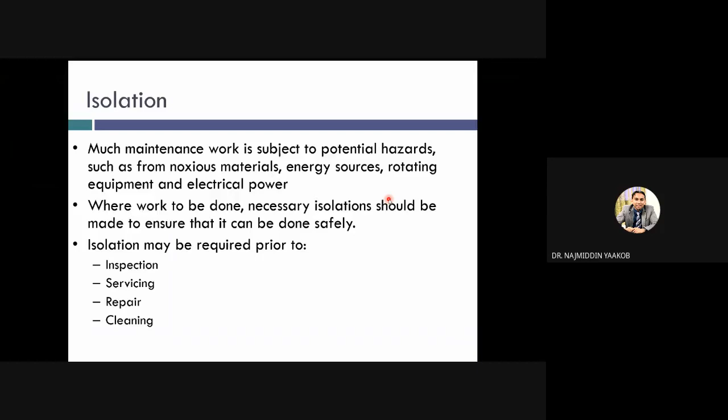There are a few methods of isolation when you want to do your maintenance. This is one way to prevent hazards, such as from noxious materials, energy sources, or any rotating equipment and electrical power. Isolation may be required prior to inspection of equipment, servicing, repair, cleaning, and also dismantling.

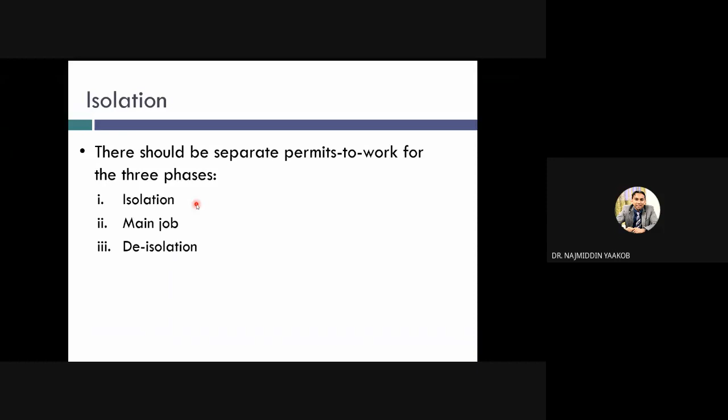There are 3 phases that should be separated into permits: PTW, permit to work for isolation, the main job of the maintenance, and also de-isolation. These are the main 3 stages in the maintenance: first isolation, then you need a PTW permit to work for the main job, and also the de-isolation.

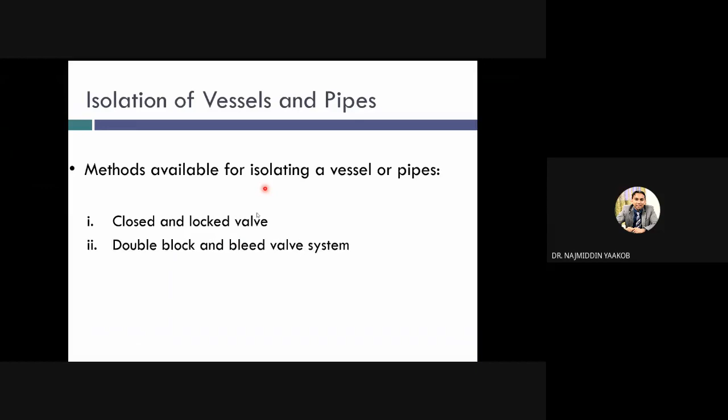Methods available for isolating a vessel or pipes: for example, you close and lock the valve, or use a double block and bleed valve system, insert a slip plate, or do a physical disconnection. We'll go through one by one.

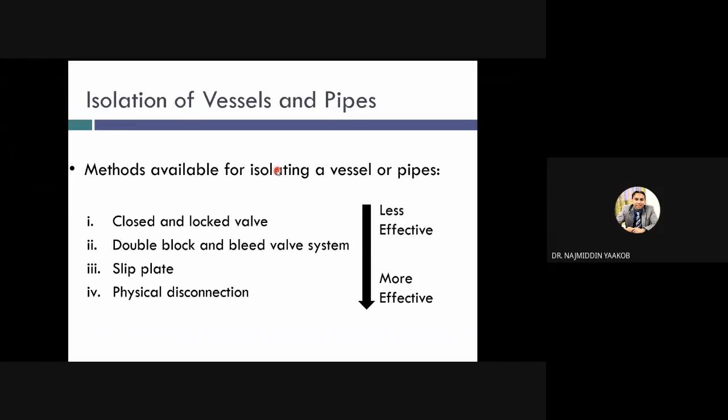However, close and lock the valve is the least effective way to do this. Of course, the most effective way is to disconnect - you isolate them by disconnecting. We'll go one by one, starting with number 1.

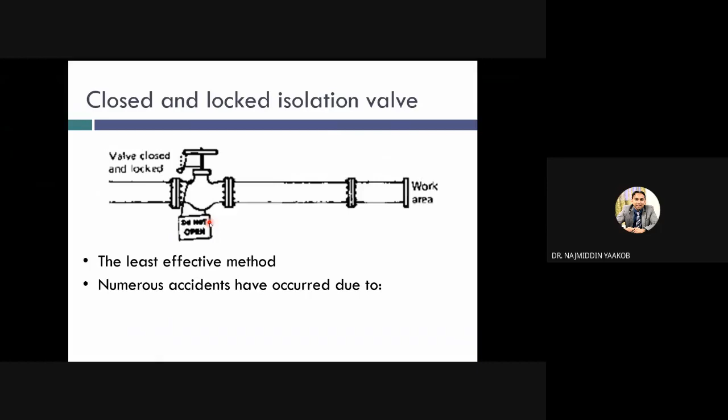However, this is the least effective method because a lot of accidents occur due to this valve becoming corroded and jammed. If this valve is corroded or jammed, the gas or liquid could still flow through while you're still doing your maintenance. So you cannot rely only on one valve for isolation purposes.

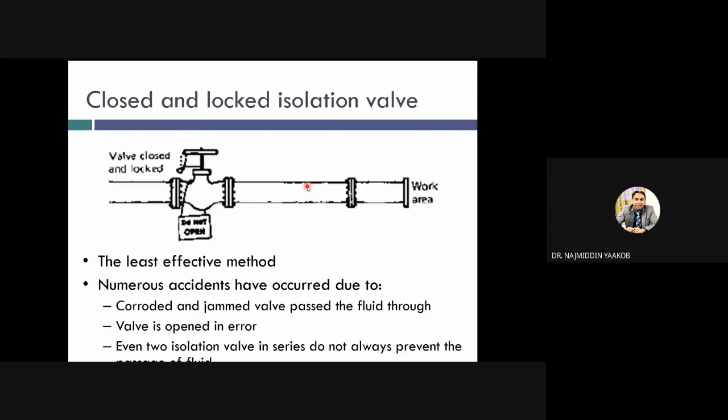For example, if the valve is opened in error - a human error - accidentally they open the valve while you are doing your maintenance work here, this will create an accident. Even two isolation valves in series do not always prevent the passage of fluid. Even though you have another valve here, it will still not prevent the passage of fluid 100%. This is the least effective way of isolating for maintenance work.

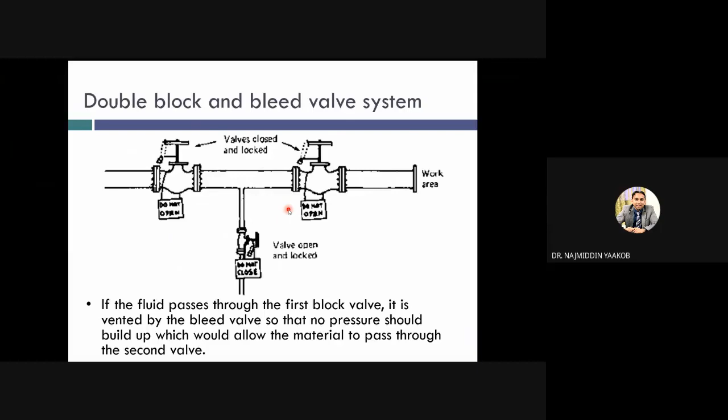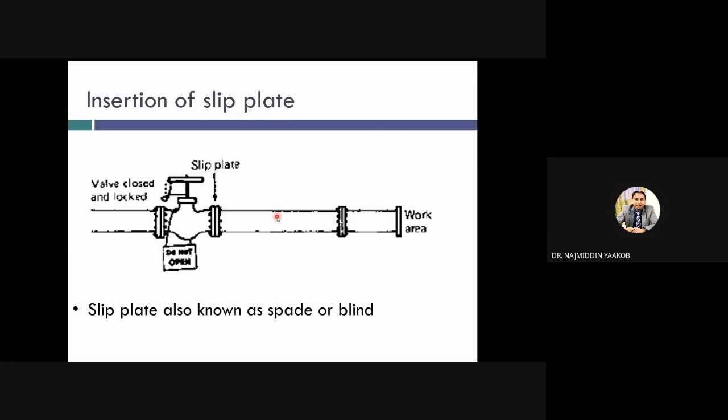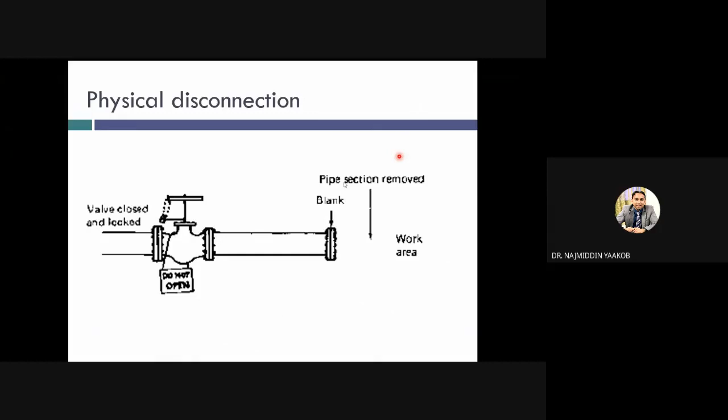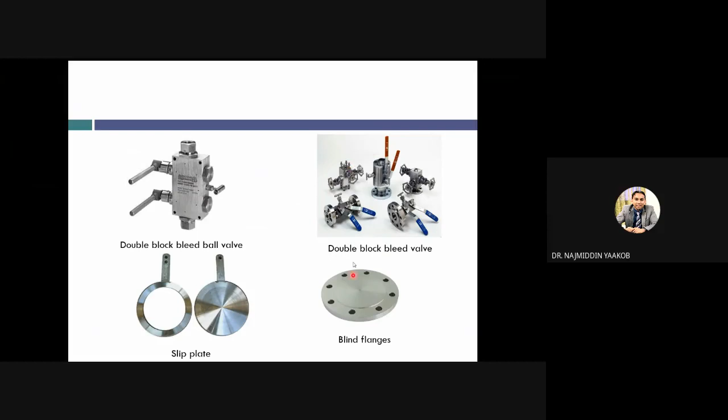When you isolate a valve, it should be locked and tagged, and you have to install a warning notice securely attached. The slip plate and blind flange used should be strong enough to withstand the highest pressure which may occur. When you use slip plates or a flange to block the valve, it needs to withstand the pressure of the pipe.

The close and lock isolation valve method should be used only for the isolation of low hazard fluids. You cannot use the lock and isolation valve method for hazardous fluids. The pipeline and vessel should be designed to facilitate isolation. When you design your pipeline or vessel, you need to make them easier for isolation.

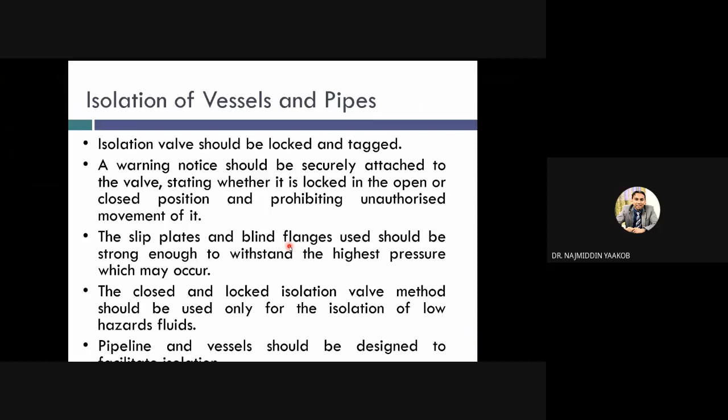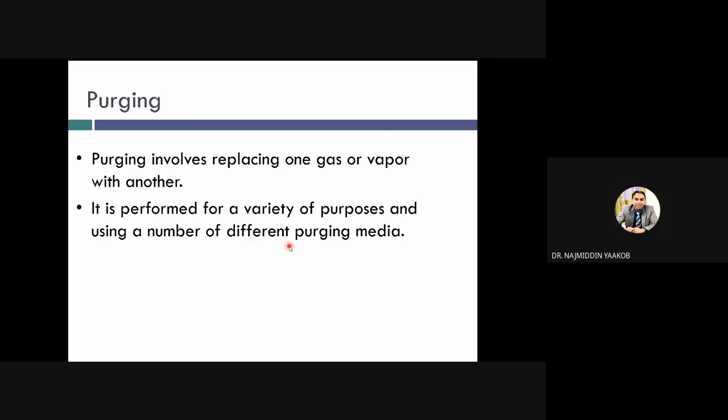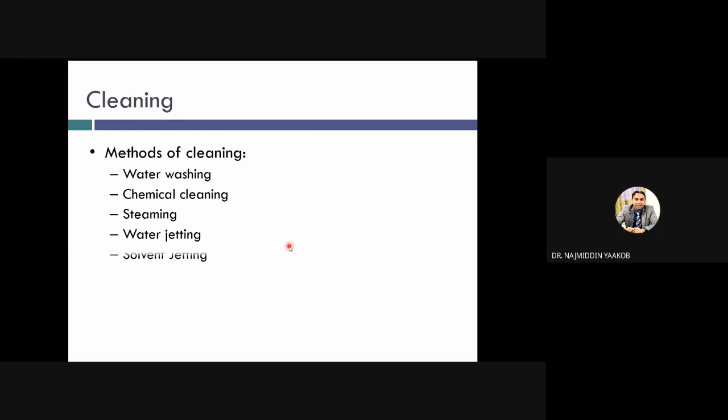Cleaning, of course, includes normal water washing, chemical cleaning, steaming, water jetting, solvent jetting - that's all examples of cleaning before you do your maintenance.

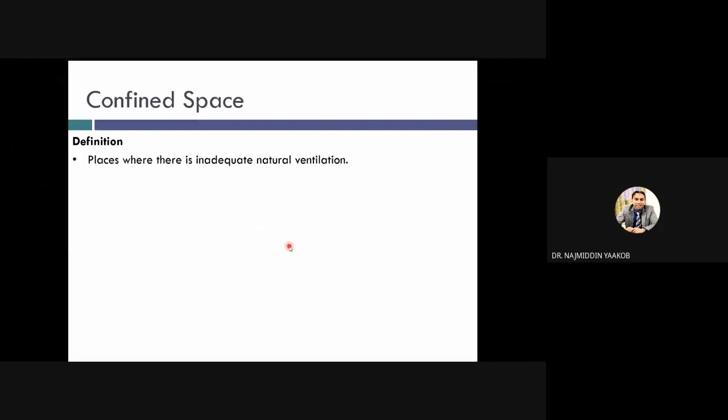These are all for your knowledge of the confined space. There are A, B, C, D, and E classifications of confined space, where it is a space with inadequate natural ventilation. Normally, you need to have a license in order to work in a confined space.

So you need to go through an exam or training before you can do your maintenance in a confined space, because most of the time the equipment is located in a confined space. So as an engineer or technician, when you want to do maintenance on equipment located in a confined space, you need to know what class of confined space you are dealing with.

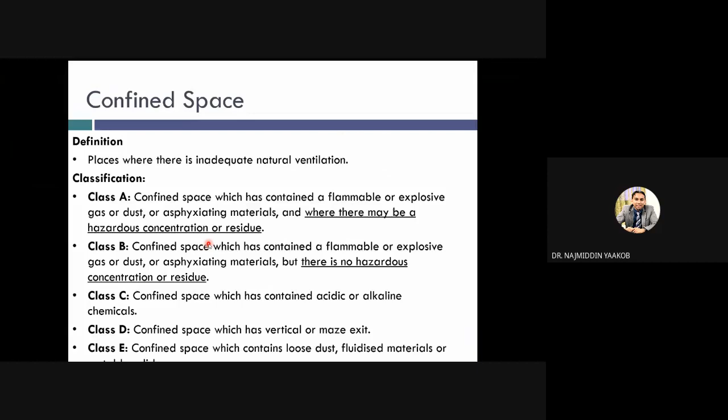So for class A, you can read all of this. Class A confined space contains flammable contaminants. Then there's confined space class B, C, D, and E. So you just read through the categories of confined space.

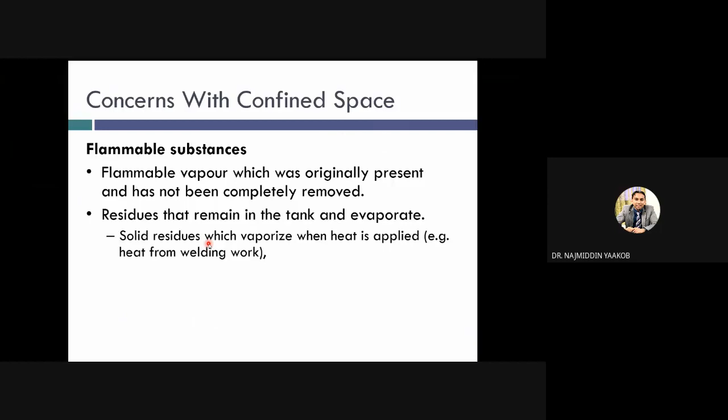So what are the concerns with confined space? Of course, flammable substances, residues that remain in the tank - they evaporate into flammable gas. So these are the concerns when you are dealing with confined space.

Toxic substances, oxygen deficiency, of course lack of oxygen, enriched atmosphere, noxious fumes. So before entering a confined space, you need to know the procedures.

You need to apply for the permit to work. You need to test the gas. For example, if there is H2S or SO2, you need to test for them first.

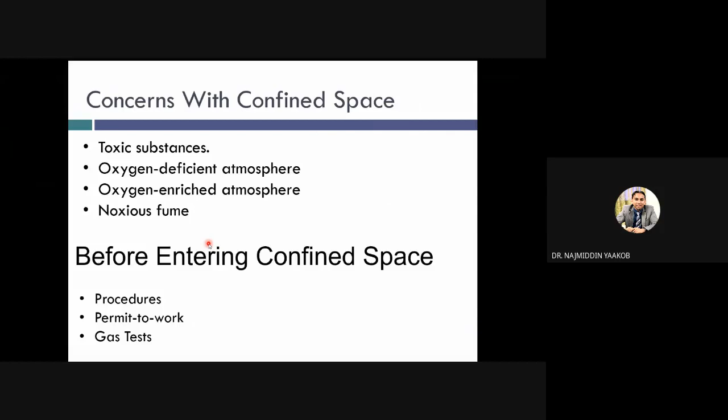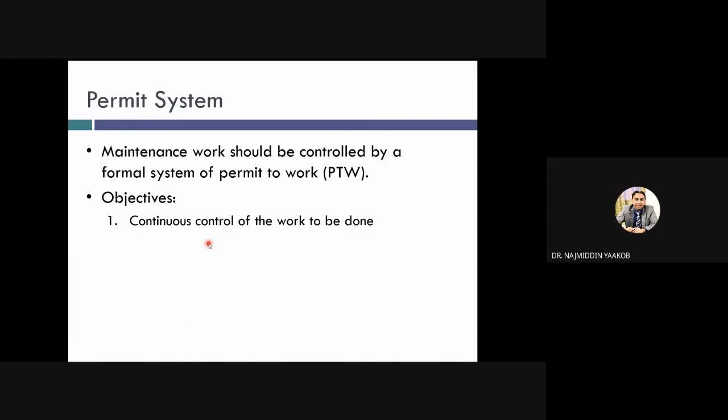Maintenance work should be controlled by a formal system. The PTW is meant to control the maintenance, so that continuous control of the work can be done, and the person responsible has overall control of the work for safety education. These are all the objectives of the permit system.

You just read through this.

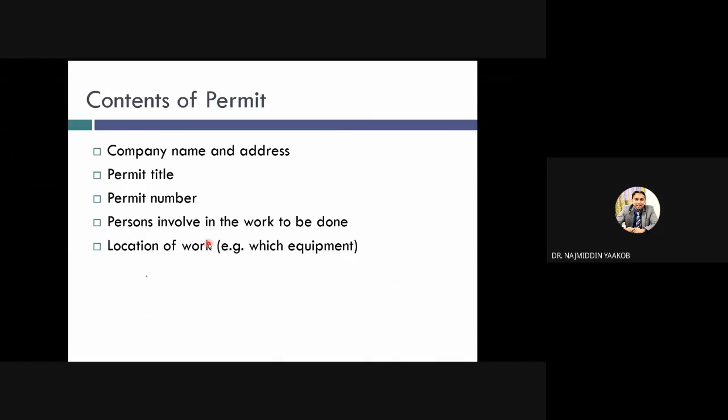These are examples of a permit to work. So you need to have all these elements in a permit to work.